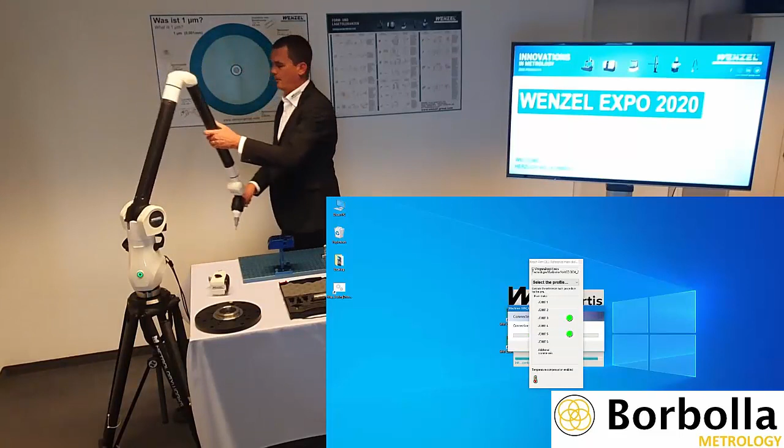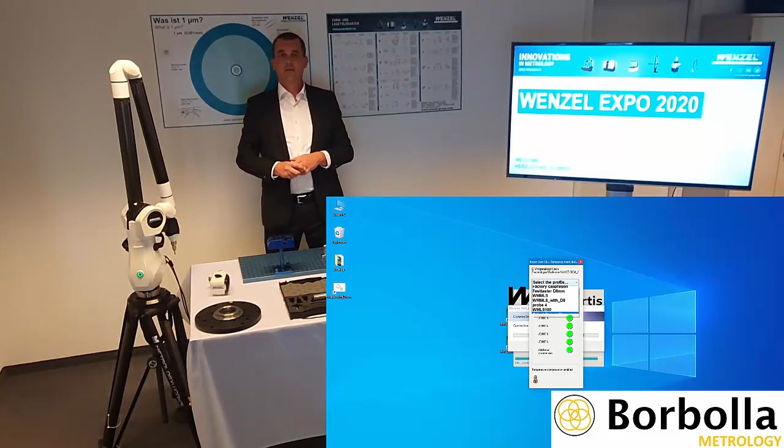When starting, I'm asked to initialize all 7 axes. The green traffic light on the computer shows the successful initialization of the axes. I move all the axes. When all 7 axes are initialized, the arm is ready for use.

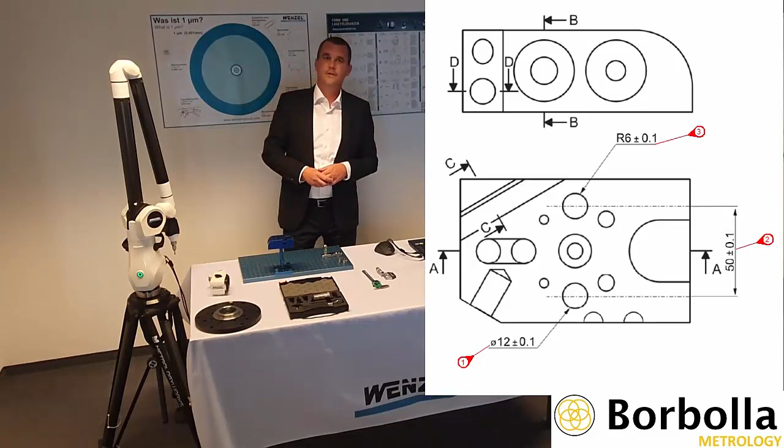We now want to measure the following measurement task on the cube together, tactile. We have characteristic 1, which is a diameter 12 mm plus minus 0.1 mm. Then feature 2, the distance between the 2 boreholes of 50 mm plus minus 0.1 mm. And lastly, feature 3 with a radius 6 mm plus minus 0.1 mm.

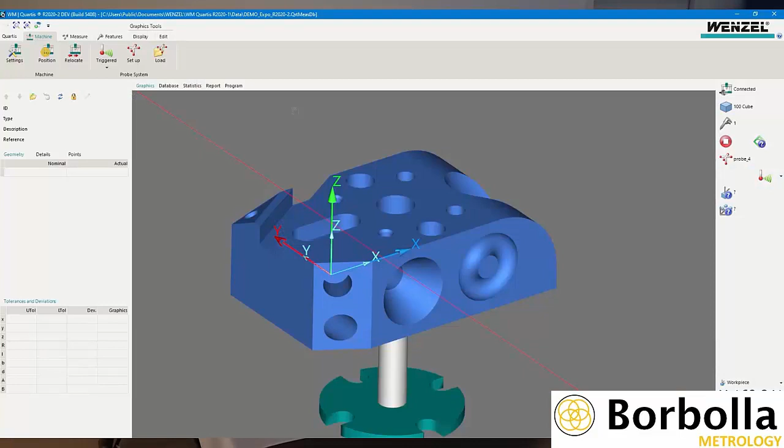At the beginning, we measure the top plane, which is the base for the circles. To do this, I select the plane in Quartis in the Measure tab and mark the corresponding plane on the cube. This is colored blue.

Now I measure this top plane with points. To get points, I pull the trigger. To complete the element, I press and hold the trigger while measuring the last point. I measure the first point, second one, third one, and the last one.

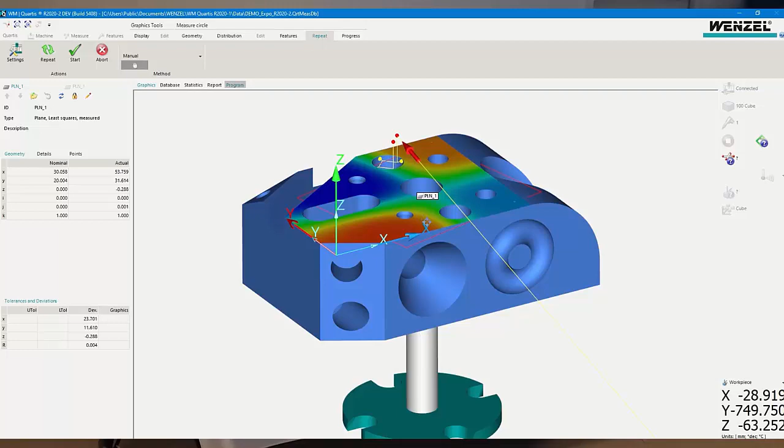Now I measure the 2 circles as shown in the drawing. To do this, as with the plane, I select the appropriate circles in the software, measure circle. Now I can measure the circles with the measuring arm. I measure the first one with 4 points. And now I measure the second one.

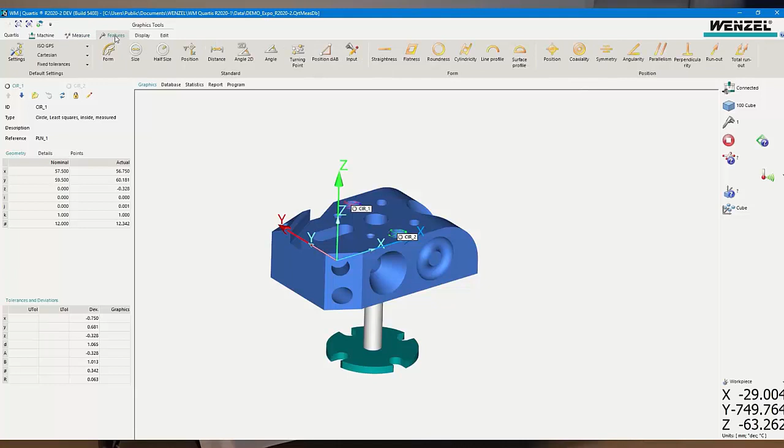So all the necessary elements for my measuring task are measured, and I start with the evaluation. I go to the Features tab and start with my first characteristic, the diameter of the circle. I choose size, then select circle, enter the tolerance, or the software does so according to ISO or ASME if required, and click on Evaluate.

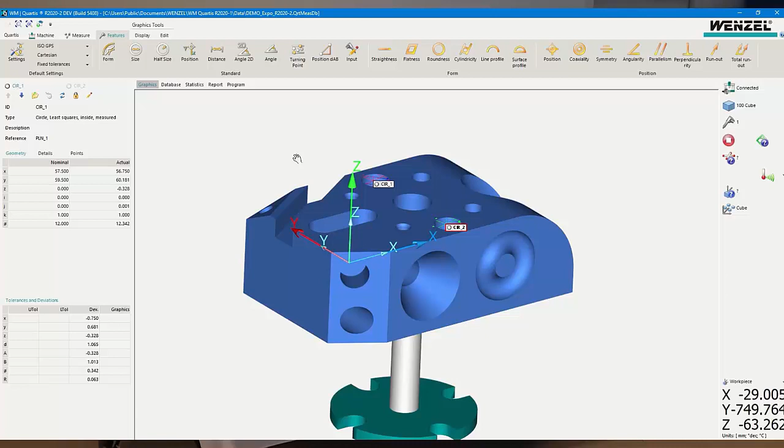Now feature 2, the distance between the 2 circles. I click on Distance, choose the 2 circles, and click on Evaluate.

Feature 3 is a radius that I evaluate with the function half size. Click on half size, choose the circle, and evaluate.

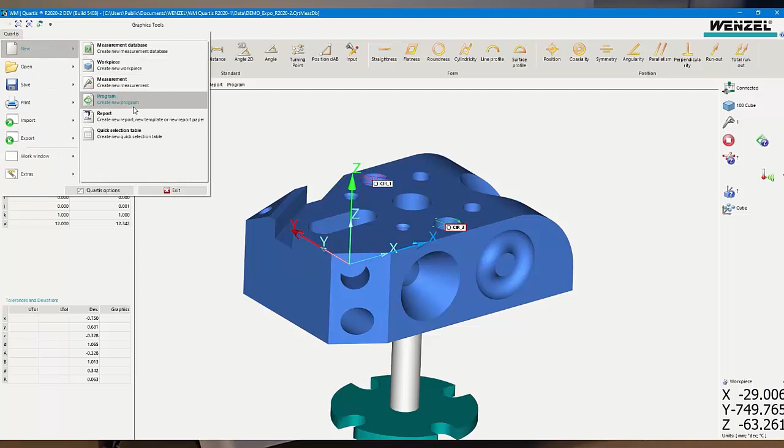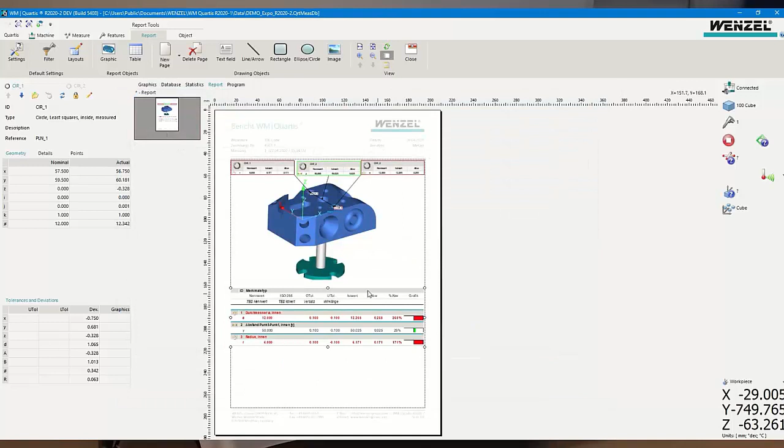In order to present these 3 characteristics in a report, I can generate a report from a preset report template. I go to Quartis, New Report. I choose my 3 characteristics in the graphic, and also in the table, and save the report as a PDF.

This was a brief introduction based on a simple measurement task. As already mentioned, the arm also works perfectly for evaluating form and position tolerance. Here is another example, which we are measuring together. This time, to get a higher density of points, we will scan the planes tactilely.

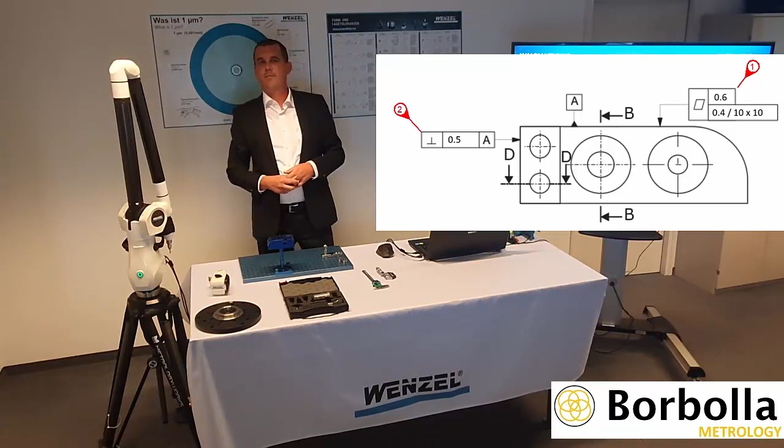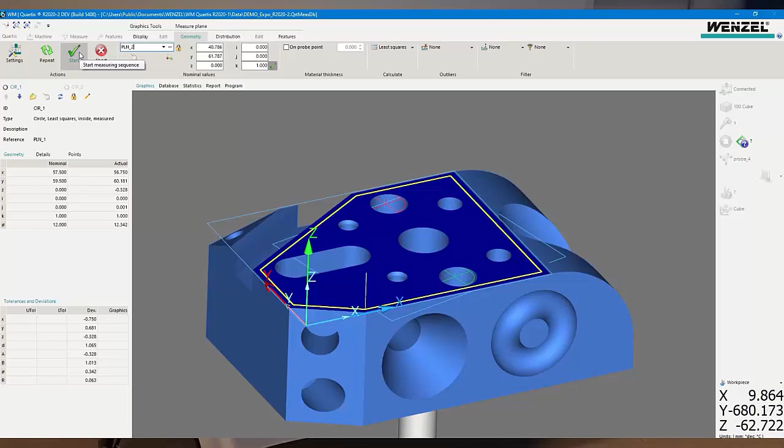To capture this by scanning, we switch the probe mode to scanning. We measure the reference plane A with the function measure plane, and select the appropriate plane. We start the measurement and now measure it with the arm on the plane. We start here, push the button one time, and we stop.

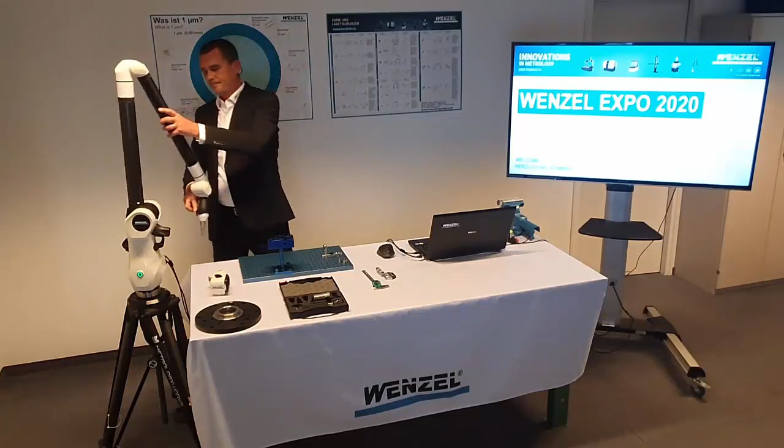We do the same with the plane on the side for later evaluation of the perpendicularity. With the function measure plane, select the plane on the side. We start the measure. Stop the measure.

So we have already recorded all elements for this measurement task, and we are going into the evaluation. The evaluation functions are divided into different groups and provided with the respective symbol. Here the form, and here position characteristics. We choose flatness and then select the top plane in order to evaluate according to the drawing.

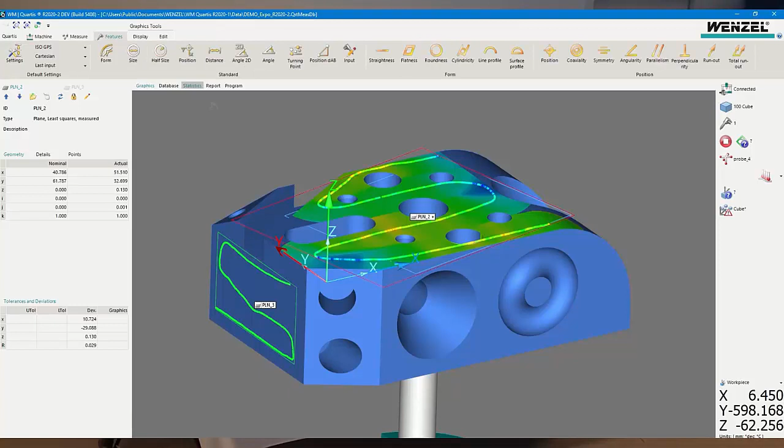We also activate the partial flatness evaluation, adjust the tolerance, and confirm this. In the case of perpendicularity, the tolerated element, the plane on the left, is selected and the plane A is set as the reference.

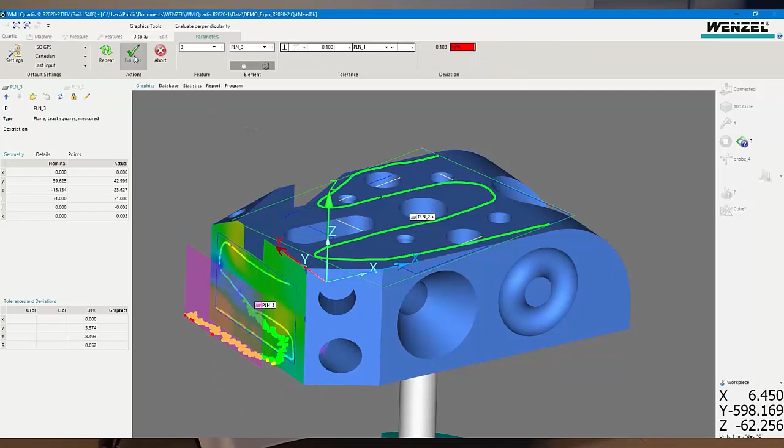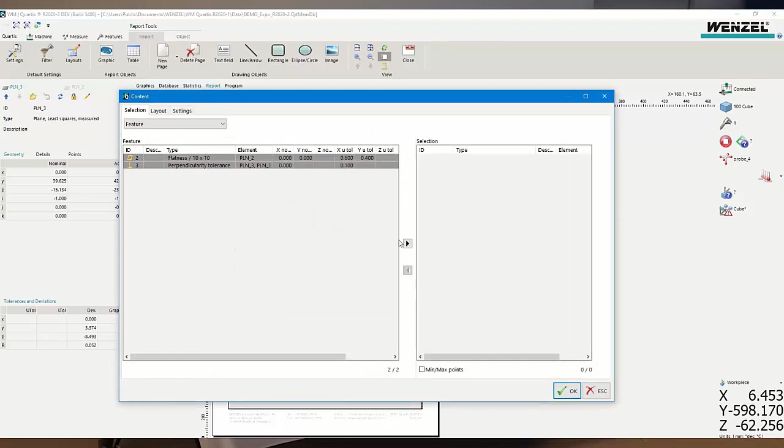Similar to the first measurement task, we can now generate a report. For this, go on Quartis, then New Report, and choose a template. In the graphic, we highlight the top plane for graphical information. We save the report as a PDF, as done before.

Measuring programs can be executed for recurring work pieces. This means that the user knows exactly which elements need to be measured and also how. The evaluation and report generation takes place automatically in this case.

In order to show you the advantages of the optical Wenzel sensors, we exchange the stylus for the WM-MLS 100 sensor. This is easily done with the auto joint connection, which can be released using the tool in the box. Then we put the optical sensor on the arm. This is done with the integrated lock system. And done.

The WM-MLS is a line scanner. The WM optical sensors were specially developed for use on the measuring arm from Wenzel. Depending on the sensor, these enable you to record a workpiece in no time, with a really high point density. You can measure with a line width up to 200 millimeters. You can capture the component with an accuracy of 9 microns at a data rate of 600,000 points per second.

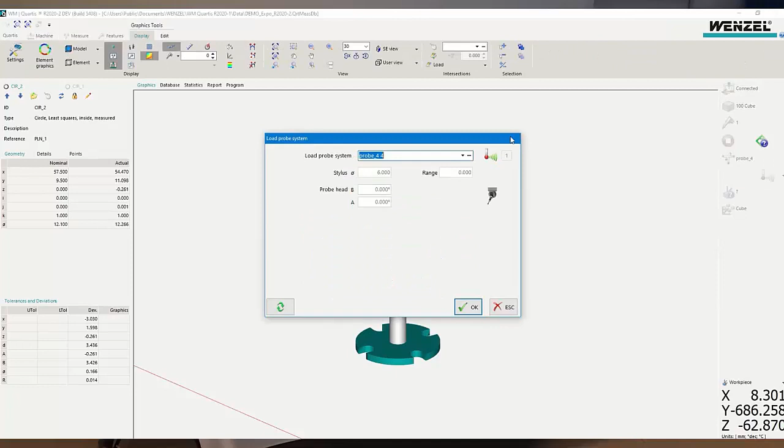We now capture an area on our cube with exactly these sensors, WMLS100. I activate the sensor in Quartis and then select the surfaces I want to measure on the cube. And then I start the measurement.

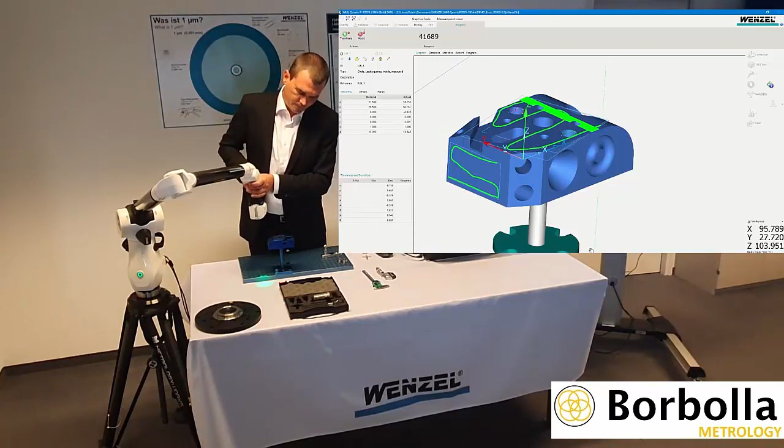Now we can measure this area with the sensor. The working distance of the sensor from the surface must be observed. Here we are supported by a green positioning light, which is used for orientation. So we start on the right side, push the button one time, stop on the left side, and we start on the back side. And we will stop on the front side.

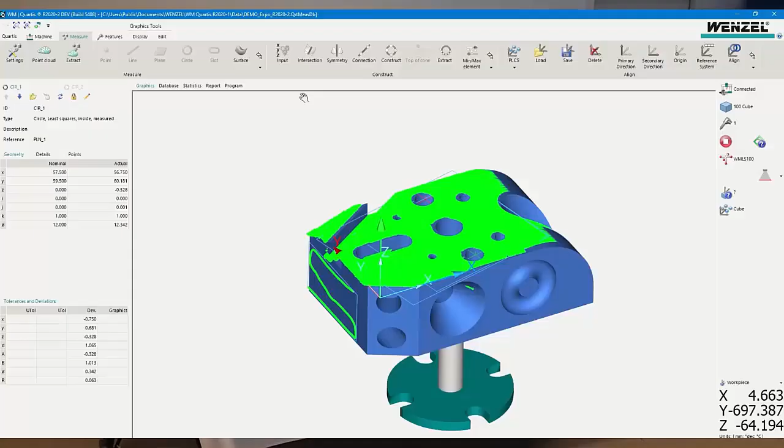As you can see now in Quartis mobile, the surfaces are measured with lots of points and can be used for evaluation. With these optical Wenzel sensors, many points can be recorded quickly and easily. Large workpieces, such as bodies, or also flexible components that do not allow tactile probing, can be measured easily and efficiently.

I hope that this webinar gave you a quick insight into the world of Wenzel measuring arms, and you take these new impressions with you.